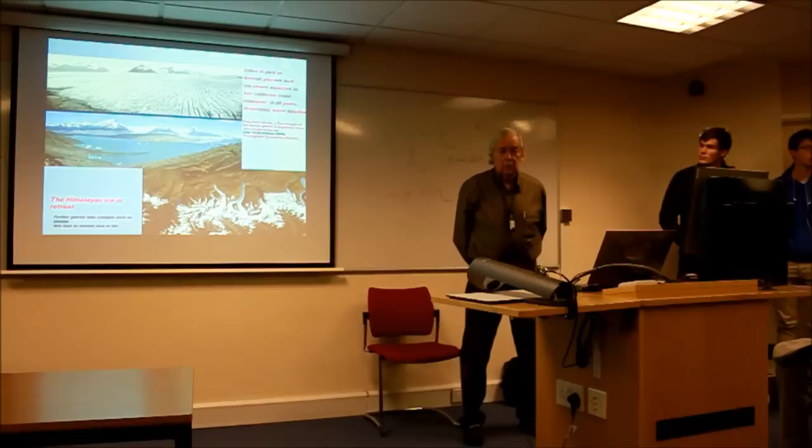Now I'm going to touch on climate change. This is a picture of the Himalayan glaciers. The top picture is what it was 25 years ago. The bottom picture is what it is now. Can you see? It's a heck of a change. And it's not just there, it's in the Andes too. And I think you already realise this, that the snow that accumulates on top of the mountains is the source of water during the summer, not only for drinking but for irrigation and food. So if this all begins to melt in the way it is shown on those pictures, we have quite a problem to face up to in the production of food and water.

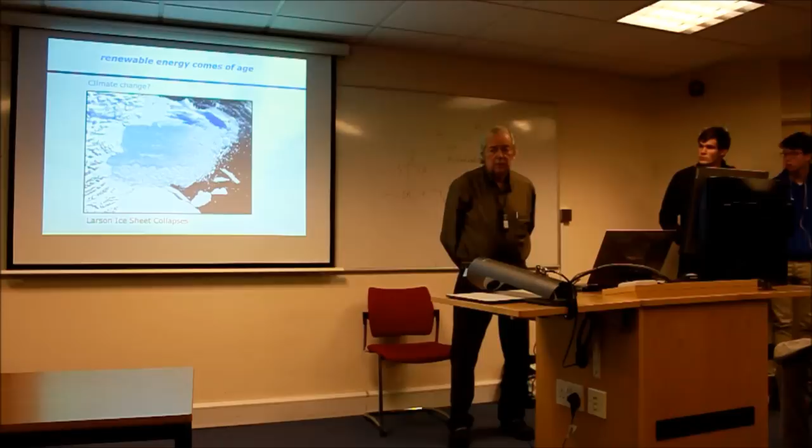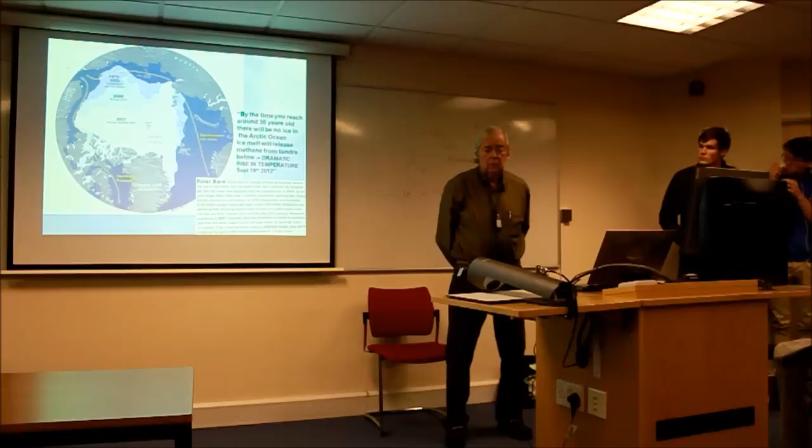Climate change. Here's another example. In the Antarctic, the Larsen ice sheet broke up. Those pieces you see drifting off are not little tiddly-winks, they're the size of some countries. And we all thought it would not happen for 20 or 30 years, but it broke up in a matter of months. And when you look at the Arctic, the other side of the world, you can see the decreasing level of ice, the grey and the white. And this year is the worst ever, and I haven't got this year's pictures yet. It will only be for 2010, of course, not 2011. But it's expected to be 25% worse than that. And by that I mean the white portion that's left.

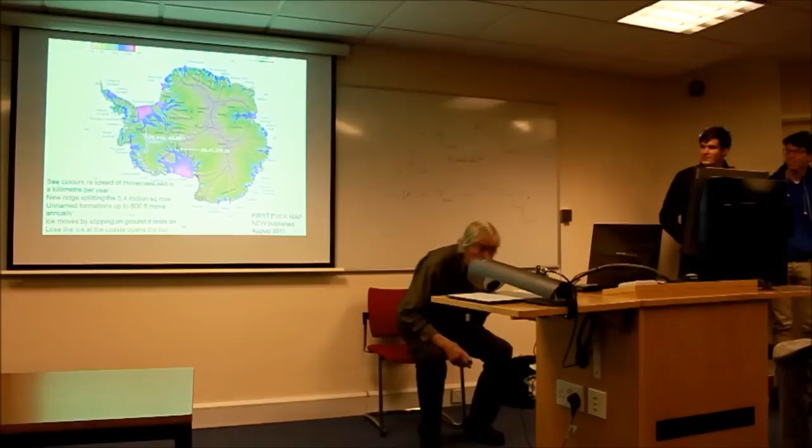So, this is the movement of ice, and that's another thing we have to regard. I'll sit down, how about that? The deeper the colour on that picture, the faster the ice is moving towards the coast. And it's 4 kilometres thick, and the ice is being cut through with descending tubes of water which provide lubrication to the ice. Now, we talk about what's going to happen when all the ice disappears, and I'll come up with that later.

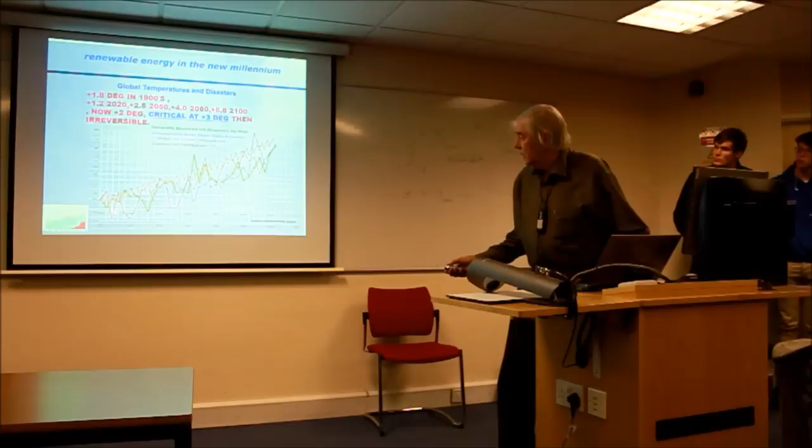And if you look at the Arctic open water anomaly, which is the temperature of the Arctic water, you can see the purple line is going and following it. And then if you overlay that with atmospheric CO2, which is the brown line, and here it is, the brown line here, and actually they're almost identical, aren't they?

So it's a pretty staring example to us that we have got a relationship, and yet there's still people in the Flat Earth Society that don't believe that climate change is happening. And mostly my age group, I have to say.

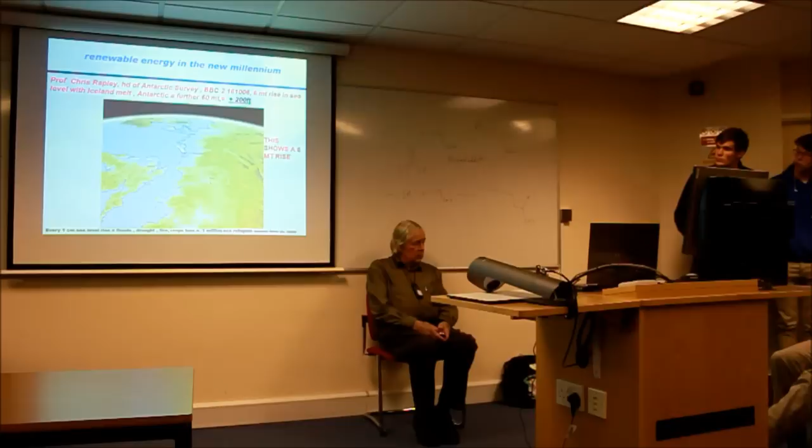Now, I've taken just the rise in sea level which would occur if perhaps the Greenland ice were to melt, and you can see in here that's a 6-metre sea level difference. So it's taken away most of the Low Countries, most of England's eastern side, London, places like that, Houses of Parliament, hooray.

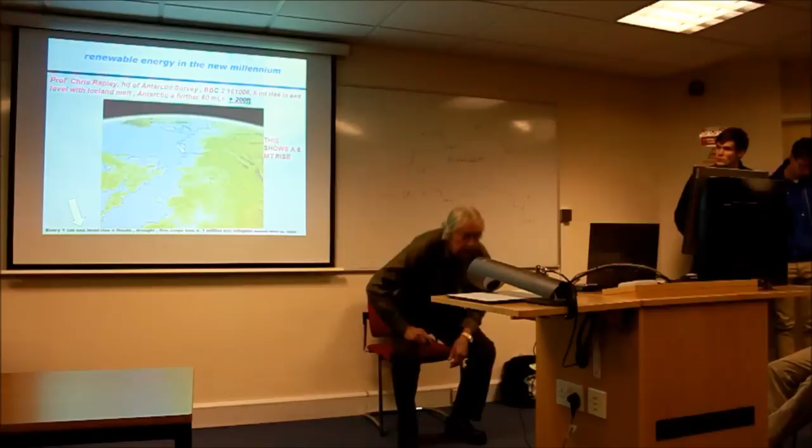And the thing is, I'll read my own notes here, for every 1 centimetre sea level rise with floods, there is also 1 million eco-refugees. And you know from the Pacific Islands they rely very heavily on a meniscus of water, and it's only a couple of feet thick. And when the sea level rises, salt water gets into that, and plants won't grow, and they've got no water, and so on. So all over the world there's people going to be migrating, which is adding to the problem of resources.

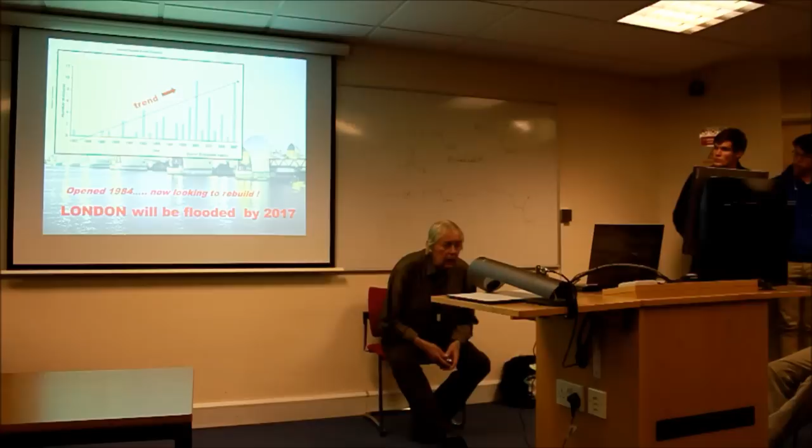Here is London City, and they've got the Thames Barrier which has been put in, and it was built in 1984. Can read that just from here. And you can see the trend of the number of closings. Now the closings are designed to stop the sea entering London when there's a high tide and a high northeasterly wind in the North Sea, and so the whole thing is gathering up the channel into London, up the Thames Channel.

Well, just recently we've had several 1 in 100-year floods, and the Thames runs through Oxfordshire, and this has been a problem. Every time there's been one of these massive floods, it's got away through the river, and it's going down and escaping through these gates because they're open. But imagine a situation when you close the gates because there's a high tide and a high northeaster wind, and now the river goes into flood. What happens? I don't know. It's going to flood London, isn't it?

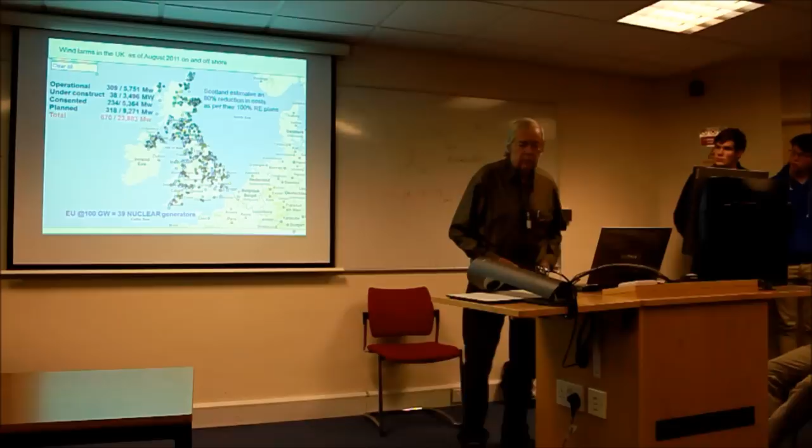Here's the number of wind farms in Britain, which is beginning to get a grip on the situation of CO2 emissions. We have a large number of wind turbines, but I must say it's nowhere near as much as they have in Europe. But we have, you know, a total of 670 wind farms and 23 gigawatts of power. In the EU, they've got 100 gigawatts of power, and that's equal to 39 nuclear generators.

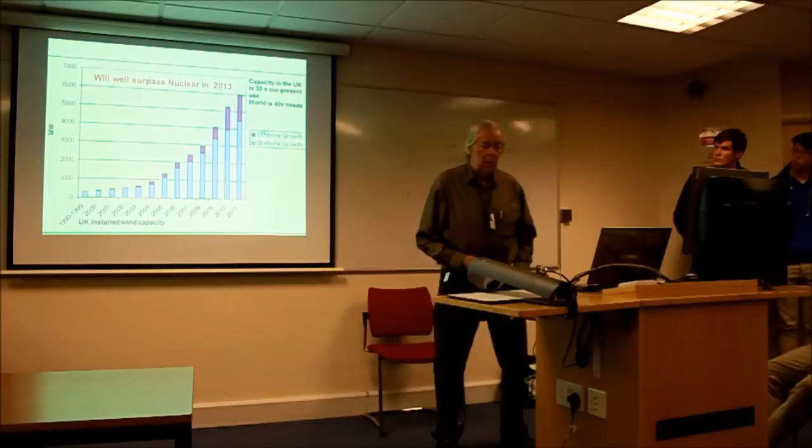Now, look at that picture at the top. Wind will well surpass nuclear in 2013. And this is where the critics say it doesn't work, because it's intermittent. So yes, it's intermittent, but you take the cake when you can eat it. And if you can't take all the cake, you have half. And that's what it boils down to. So you're going to have another form of energy generation and a form of energy storage. I'm going to move on to that later.

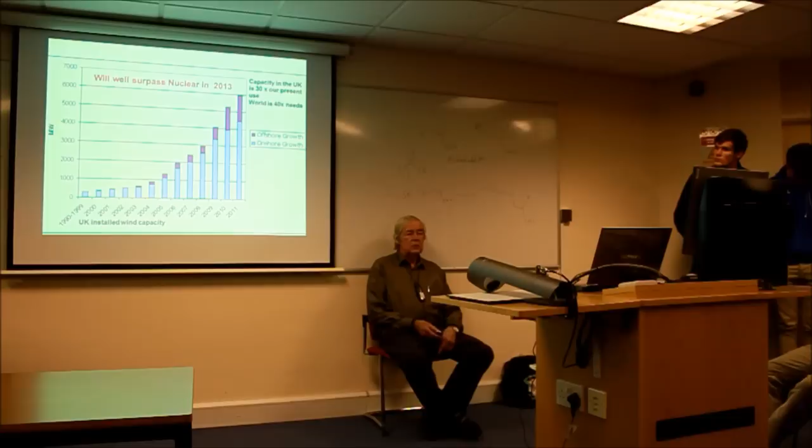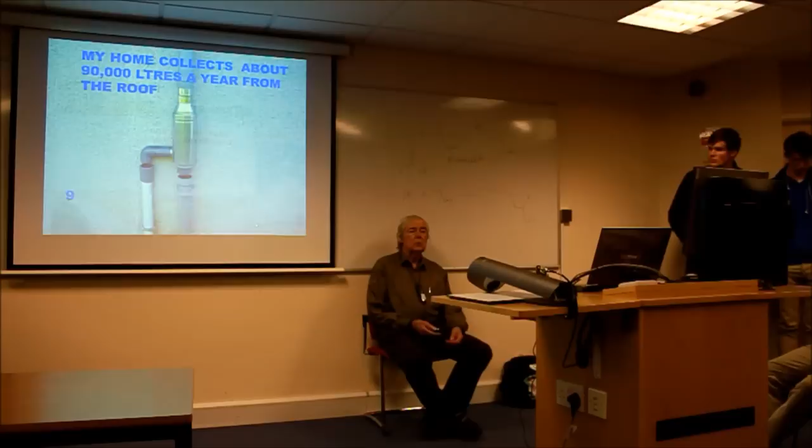Remember, if you're just using wind or tide or sun, the cost of the basic fuel never goes up. So you've got a fixed, anti-inflation, anti-OPEC tool. In my own house, I've done what I preach, and that is we don't have any water supply, we don't have a pipe. So I've had to collect my own, and I collect off the roof. And 97% of the Earth's water is seawater. And that's a sobering thought, because to get seawater into fresh water takes enormous energy.

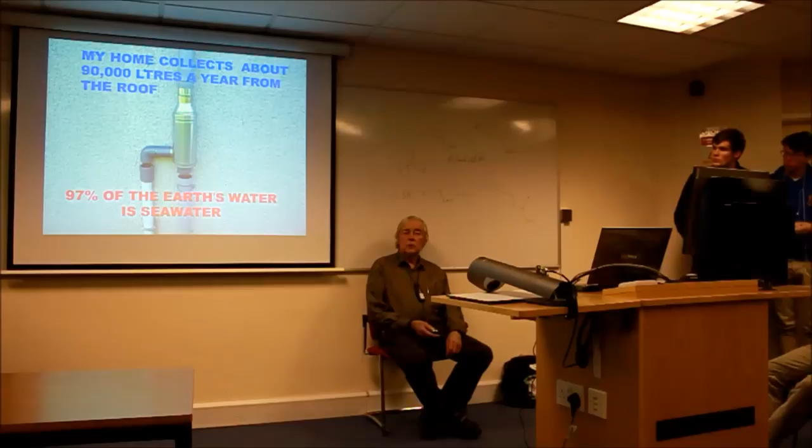We've got two 25 kilowatt wind turbines, which I built myself, and they generate between 40 and 50 megawatt hours a year. So it's not inconsiderable for one little farm. We export, of course. But then there's the question of building, and this will come partly into your course, of course, in the form of engineering in buildings.

But when you have a conventional house and it gets cold, the heat escapes through the walls and the roof. It soon gets cold. But in the summer, a conventional house is just the opposite, isn't it? It picks up heat from the outside and it gets hot inside.

And then you have to install air conditioning, and that's another form of energy, which is another form of CO2 emission. Now, if in the construction we can put a triple insulated housing, that is 3 times the insulation that the architects want, we have a very stable temperature all year round. You don't need any heating or cooling at all, and you can have a minimum spend on renewable energy technologies, because they're not cheap. So why spend it if you don't waste it?

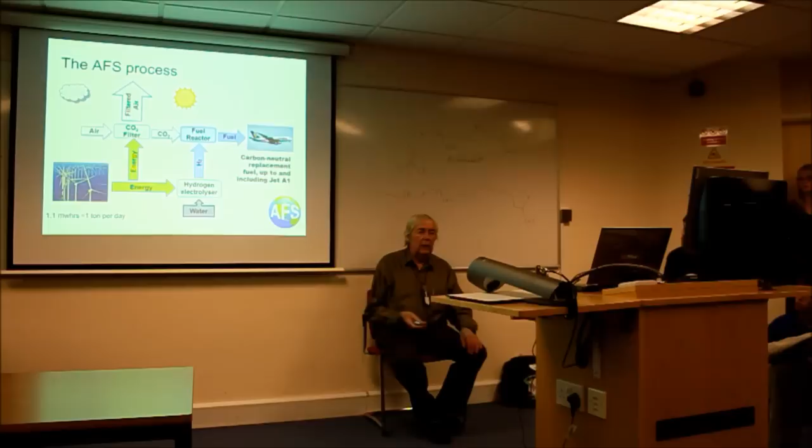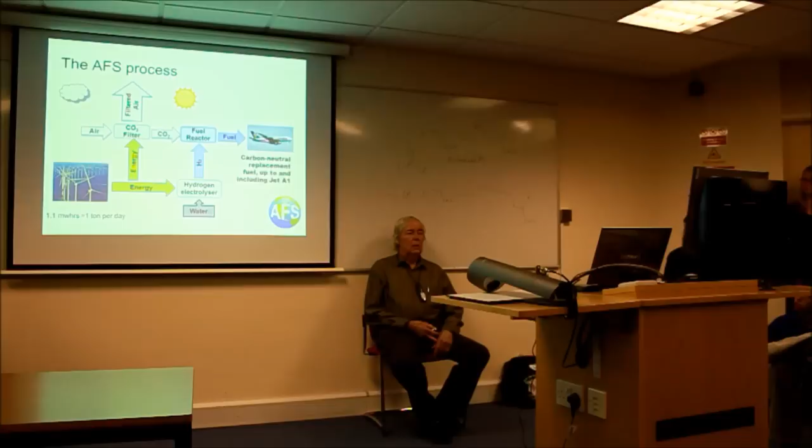And then it goes into a standard hydrogen electrolyzer and produces hydrogen, and then we react the two together in a catalytic process. And it's exothermic, which those of you who have any knowledge of chemistry will know. It produces its own heat, and it runs up to about 200 degrees C, or more if you don't cool it. And we shall use that heat when we have a production plant as part of the plant process to produce the energy.

The scrubber demonstrates very simply, if you take sodium hydroxide, which is caustic soda, and you spray it down through a tower, with a gentle updraft of air going the opposite way, finely atomized sodium hydroxide. Not a big pump, not a big energy cost. Well, then it becomes sodium carbonate, baking soda, and so you put it into a tank at the bottom of the tower, and you take it through an electrolyzer, which is a tri-cell electrolyzer, and it produces 3 gases. It produces CO2, it produces hydrogen, and it produces oxygen.

So now, we think we can get that to work to get the stoichiometric level of CO2 and hydrogen at the ratio of 3 to 1 to give us a standard fuel without having to electrolyze as well. We haven't done that yet. We're electrolyzing and we're collecting the CO2 and chucking the rest of the stuff at the moment. But that's because we're in a test mode.

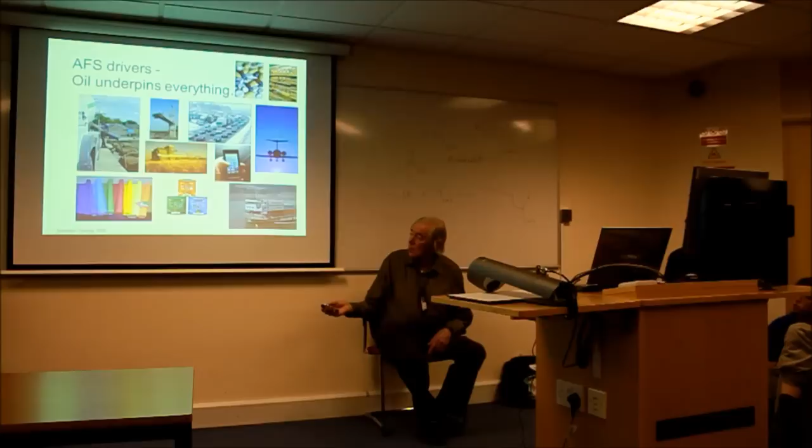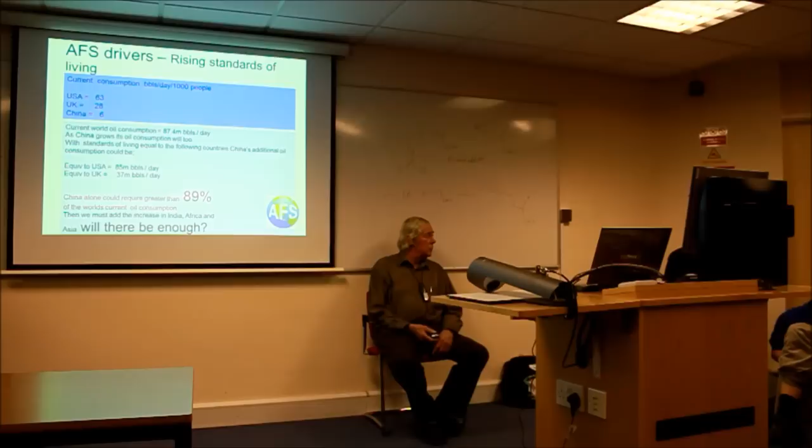If they come to our standards, this is a shocking point. Oh, sorry. I'm not criticising China at all, because they do a lot to try and ameliorate what they're in for. But they alone will require 89% of the existing world oil. So that's without it running out, just demand. So will there be enough for the rest of us? Because India is going to want more, Africa, Asia. We've got a rising economy too.

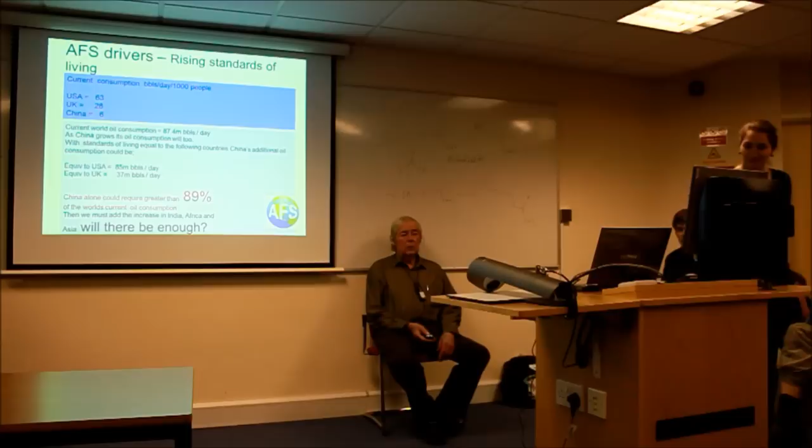I'll talk about the drivers from having a constant growth in gross national product, which is not my scene. I think that's a wrong thing. We shouldn't be doing that ever. But still, I'll tell you what I think. So oil underpins everything I do and you do. The tarmac on the roads, the concrete curbs, the lamp standards, the car steel, everything we do. This building, made of oil.

Why are we better than other fuels? Well, one thing is that we're better than electricity as batteries at the moment because the energy density is a lot higher, and it fits the existing infrastructure in being a drop-in replacement: petrol, diesel, Jet A1, methanol. And incidentally we can make fertilizers and plastics as well, and pharmaceuticals, and so really a very versatile fuel.

So if you imagine the 747 carries 50,000 litres of fuel, and that's 500 megawatt hours, well that's more than enough to drive a big city. So every time a 747, and there are how many of them flying? Hundreds, is using that sort of energy.

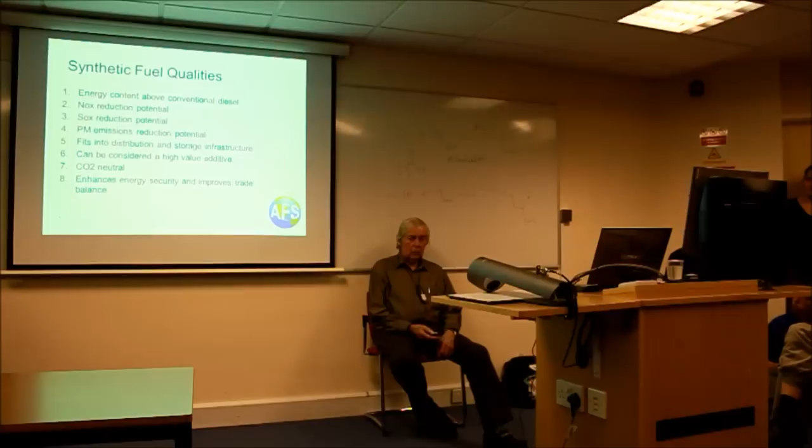Now, synthetic fuel qualities. It's above that of conventional diesel. It's above that of conventional petrol. The analysis of the petrol we've got is far superior to anything on the market. Because it's pure, it contains no sulfur, to a constant measure, it's not like a variation from every oil well.

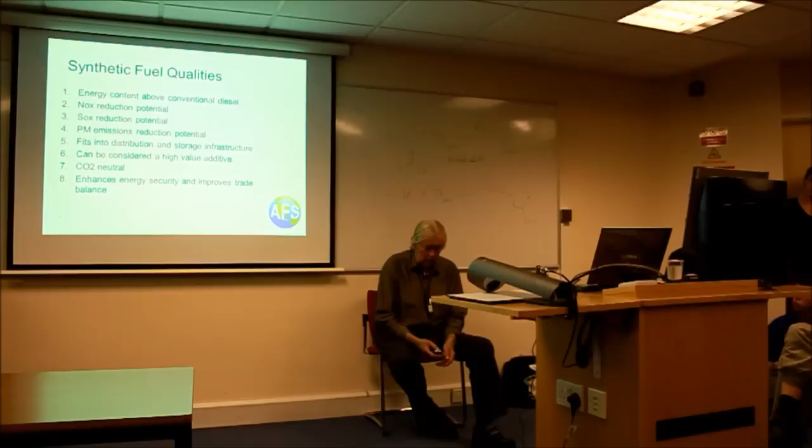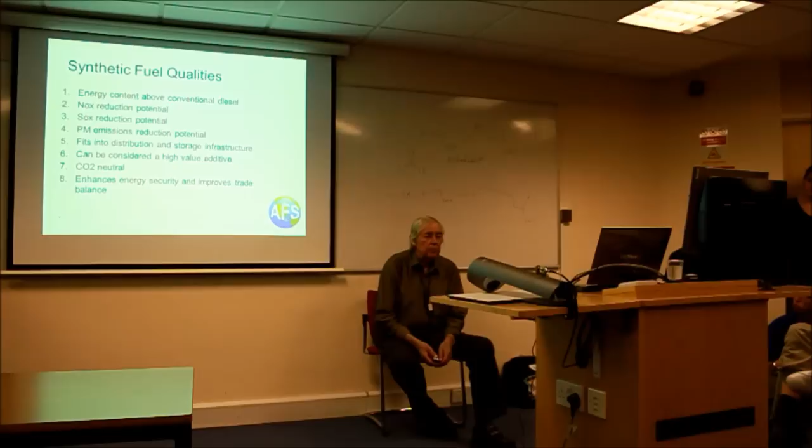The sulfur dioxide reduction is huge. The emissions reduction is complete, it's just a neutral fuel. It fits into the distribution system, CO2 neutral, enhances energy security.

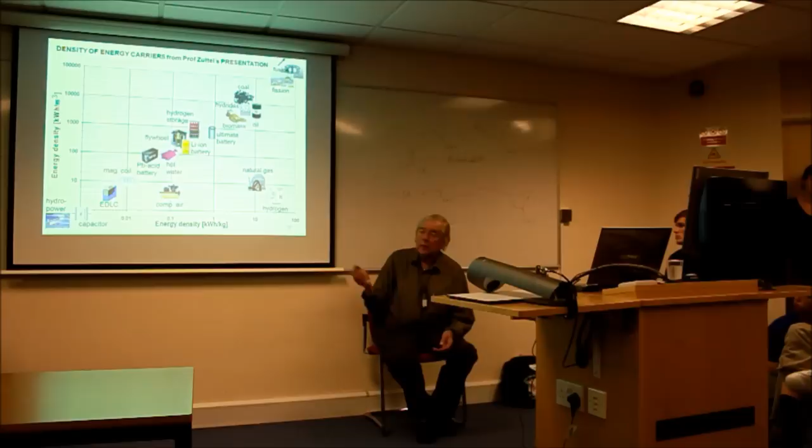Though I have to say some of the new general aviation aircraft, the light ones, the 4-seaters, which started at 10 minutes flight with batteries, are now up to 3 hours. So there's some potential.

We talk about the moon. He3 exists on the moon in big quantities, and it's a huge benefit for the fuel system. How can we get it back? That's something for you guys to sort out, not me. So when you go into business, you've got to think how we can go to the moon and mine that He3 and bring it back. If we can, it will be very helpful to our energy system.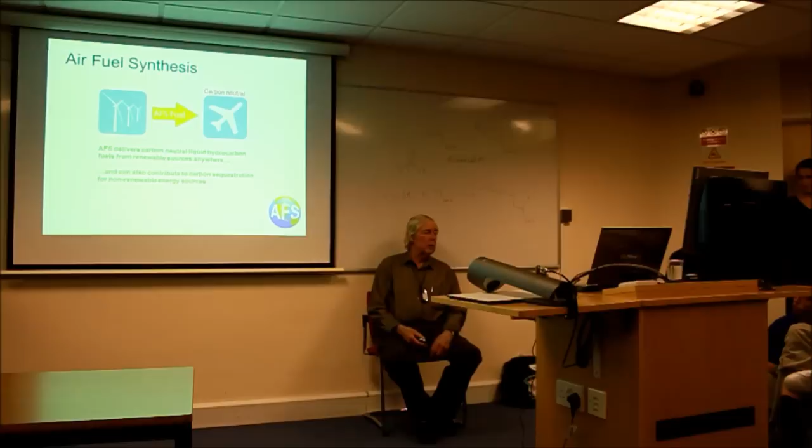If it did, we'd be into an ice age, and I'm not suggesting that we want to start geoengineering, because that's fraught with all sorts of difficulties. But you could bring some of the oil out of the oil wells and use it as a means of controlling the temperature. Just a thought.

This is the process in schematic form, which I've described to you. You can see the tower, which has the spray droplets. You can see the collector of sodium carbonate, the hydrogen electrolyzer, and the two reactors for fuel. It's not complicated, it's very simple.

We use the sodium hydroxide stripper, and it's not our invention even. David Keith at Calgary put that unit up in 2005, and there are various people using CO2 collectors for buildings that contain plants—agricultural plants, cultivation. So we've taken existing technologies, we haven't invented it. What we've done is put them together, which no one's done before.

And this was another chap who helped us, his name was David Fletcher. He invented a system, the tri-cell electrolyzer, which I mentioned to you, that produces the gases. And we've used that. You know the principle of electrolysis—you've done it in primary school: two carbon rods in water, hydrogen and oxygen coming off with the DC current.

Now this chap, very interesting—this one, Reginald Mann. Unfortunately he died just after he started working with us, that was one of those things. But he said he was working at Castrol Labs in Pangbourne in the 1970s, where a Fischer-Tropsch plant, which is a reaction of CO, carbon monoxide, and hydrogen, was running. Inadvertently some CO2 got into the process line and it went much better. And that gave us a clue. So we thought, well, we can probably react CO2 and hydrogen together, and I can tell you we can.

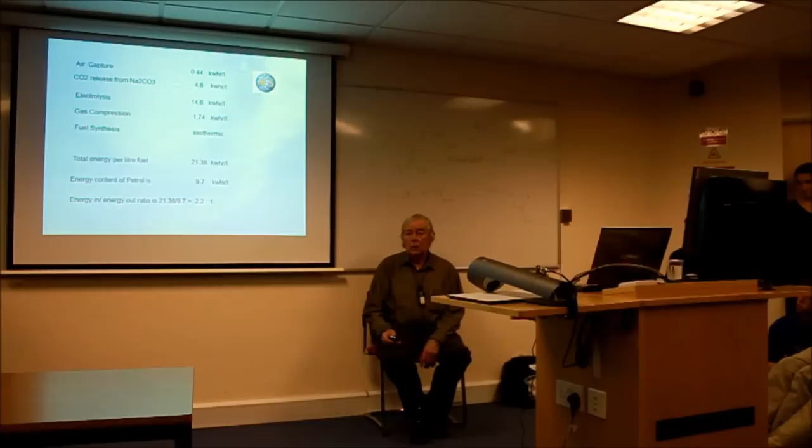Now, I talked about energy. So when we look at the energy involved, nothing can be 1 for 1, take it for granted—you cannot do that. We're about 2 and a bit to 1, which I think is very good, because most energy conversion factors are usually more. Your car is 18% efficient, a power station's probably 30% efficient. So we use, in terms of the energy content of petrol, 9.7 kilowatt hours per litre, that's a measure.

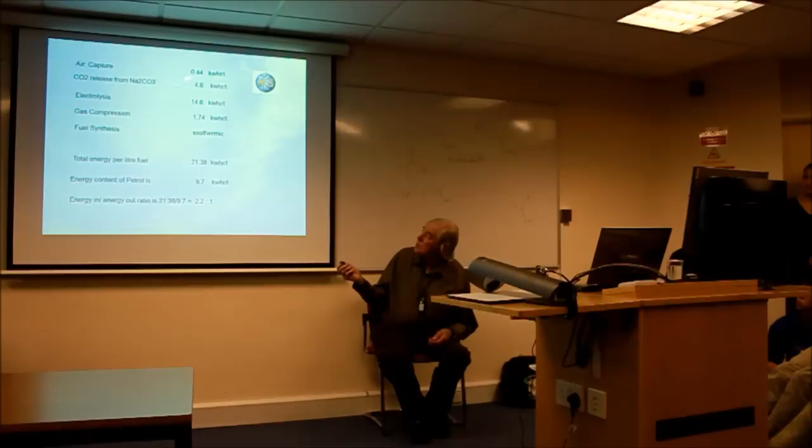If you take, well, we're using 0.44 to collect the air, we're using 4.6 kilowatts to release it with the electrolyzer. And you go down the scale there, the actual fuel synthesis here is exothermic, so it's actually giving energy out, and that's a benefit to it. The total energy we use is 21.38. So you could say it's a ratio of 2.2 to 1.

Now, we've only just started. You can't tell me that when the oil industry started in 1880, they were as efficient as they are now. I doubt it. And oil was extremely expensive, and it was cheaper to use whale oil, which was really sustainable. And so we think that probably in 20 years' time, when this process is pretty well universally adopted, if it is, the energy efficiency will be improved on that. I personally believe that we can get down to 1.83, and others believe even lower, but I've yet to prove it, we can't. I mean, we're still working at it.

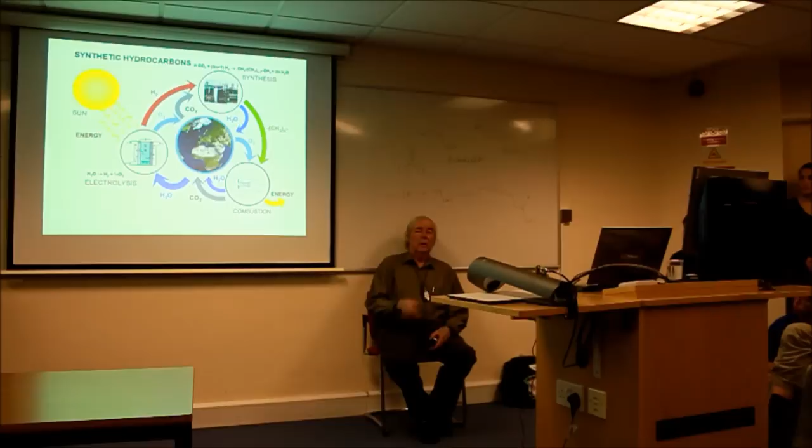This is the carbon neutrality cycle in producing synthetic fuels. And everything is from and to the Earth, and it's fed entirely by the sun. There is no drain on the Earth's resources whatsoever, and no addition to the Earth's atmosphere or sea or water or land. Because if you can imagine, you make a synthetic fuel from CO2 captured from air, you put it into an aircraft, you burn it, you release CO2 and water. So you're releasing the CO2 and water back to the atmosphere. Well then, somewhere else, 100 miles away, you're collecting the CO2 and water in the same quantity, feeding it back into a reactor, and it's a virtuous circle.

And if we could do that, it is a fact that the Earth has a tremendous absorptive capacity of CO2, particularly the sea, and also the land, the soil. So at the moment we're chucking CO2 into the atmosphere so fast that the Earth can't absorb it. If we could stop chucking it in the atmosphere and just stay neutral, not sequester it, just stay neutral, the Earth would on her own account recover it in 20 years. So we have a challenge there, and that's something we can think about, because I'm worried for you and your children, because what's going to happen is unthinkable in terms of temperature rise of 3 degrees or 6 degrees centigrade.

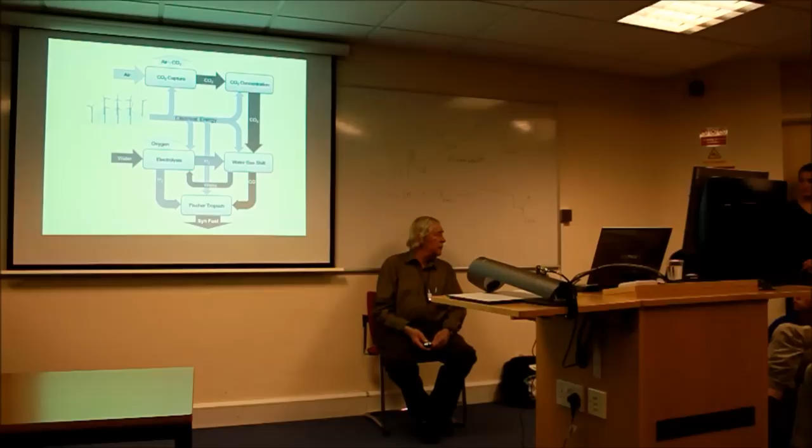A bit more detail about the process than the rather vague schematic that you saw earlier on, and those of you who are interested might find it interesting. I think Elaine said that this talk will be available afterwards, won't it? There's a number of slides on there which are not here, which are relevant to other audiences I gave, but you might find them useful if you look at them.

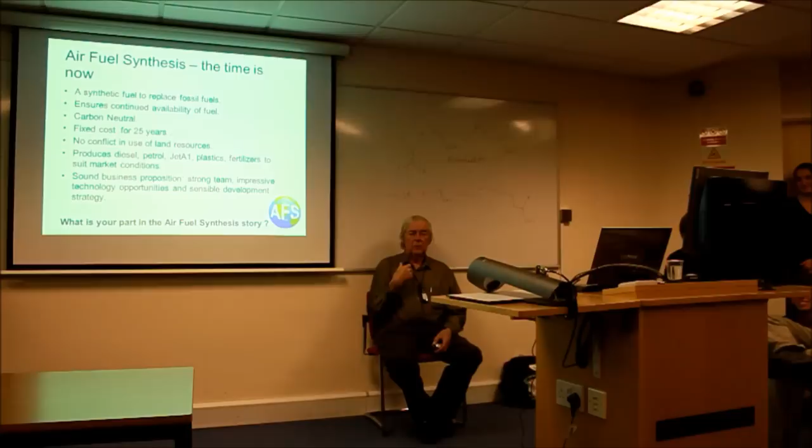The time is now, a synthetic fuel to replace fossil. It ensures continued availability of fuel as opposed to it running out on us. And you know, when fuel runs out, you remember the slide where 89% of the oil is going to be wanted by China. You don't tell me that'll be a peaceful transition, because some countries who want a lot more oil will want to take it by force, won't they? Without mentioning their names. So there's no conflict in the use of land resources, and we can produce diesel, plastics, as I said before. And it's a good business proposition as well, which is the main point.

Now, some of you might have heard of this trans-European high voltage DC grid, which is proposed, not been built, and it's under consideration in Europe. The idea is that we have a planet which is hot at the middle and cold at the north. And it's windy at the north, and sometimes windy in the south. And it's sometimes sunny in the north, sometimes here. So, if you built a huge grid of DC links undersea to each country, at any time the intermittency of renewable energy would be overcome. Because when it's windy and rainy in Scotland, it might be sunny in the Sahara. Does it rain in the Sahara? I don't think so. And so what I'm trying to say is that over a big distance, you could equalise the intermittency factors.

So it's not built, but I think it would be a good idea if we could build it. I mentioned that we use 140,000 tonnes a day. I mentioned burying it in the old oil wells, so that's been dealt with.

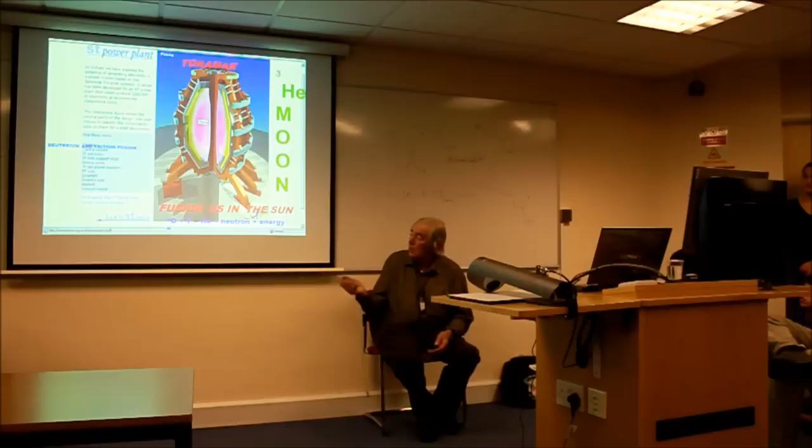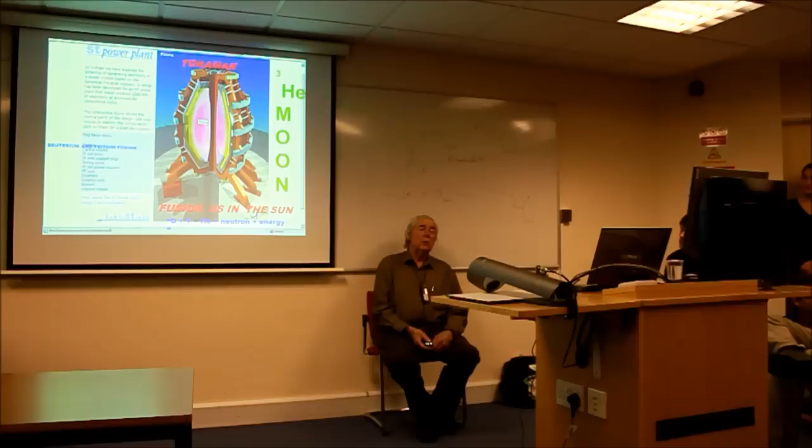Those of you who are interested in the fusion reactor, this is the tokamak reactor at Oxford. I've been inside that, and it's very fascinating because there's no radiation at all. They have intense temperatures in there, the temperatures of the sun, contained with a magnetic field. It's a foregone conclusion that they'll do it, but quite when, we don't know.

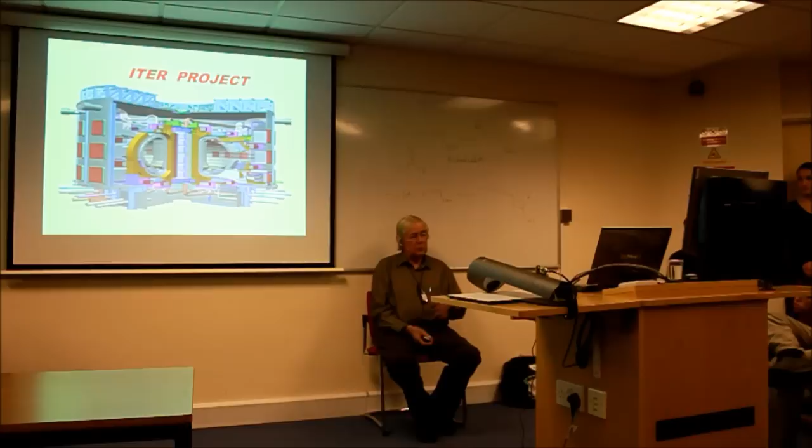And this is the ITER project, which is the international one. It's a similar principle with the toroidal chamber, and that's the one that's running in Europe. Now, it's based in France, but it's Chinese, it's Russian, it's American, it's British, it's Indian, Australian. They've all put money in, all together.

This is something about our lifestyle and what's happened. If you think about how long it took to get to the Industrial Revolution, it took 10,000 years of civilization, from man starting 8,000 years BC to 2,000 years AD. Then it took about 200 years to get to what I call the dot-com revolution. It's not far back when computers first came in and everyone said, oh, that won't work. But of course, it's now our lives, isn't it?

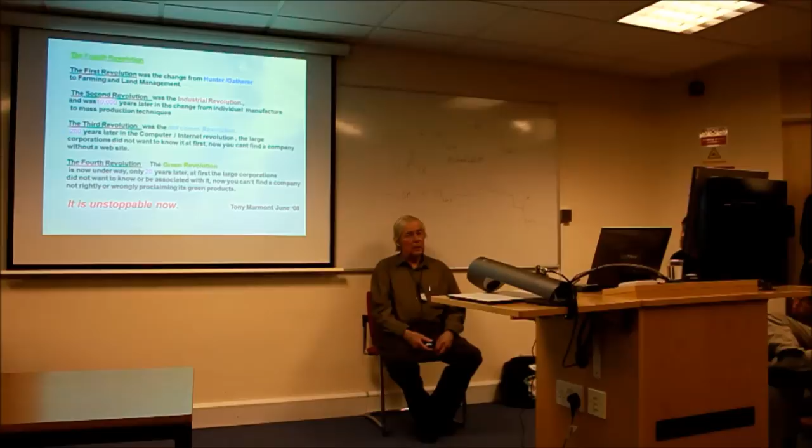And then the Green Revolution has started in only 20 years. I've been at Green Revolution for 25, and I'm telling you, it is the next industrial revolution change. To make clean energy as opposed to dirty energy, we will realise it's the only way we can survive.

Now, I mentioned earlier on about prosperity without growth. Prime Minister says, oh, we're in a mess, we can't expand by 1.5% this year. I don't think we should even try for 1.5%. I think we should stand still or minus. Now, how can that be economical?

Because we should force companies to be more usable in materials and energy. I spent 60 years of my life making lemonade and cola. I had a big plant, had 700 people, did 20% share of the UK market. All of my time I was at work, I had a constant sales line increase and a profit increase through all the depressions and everything.